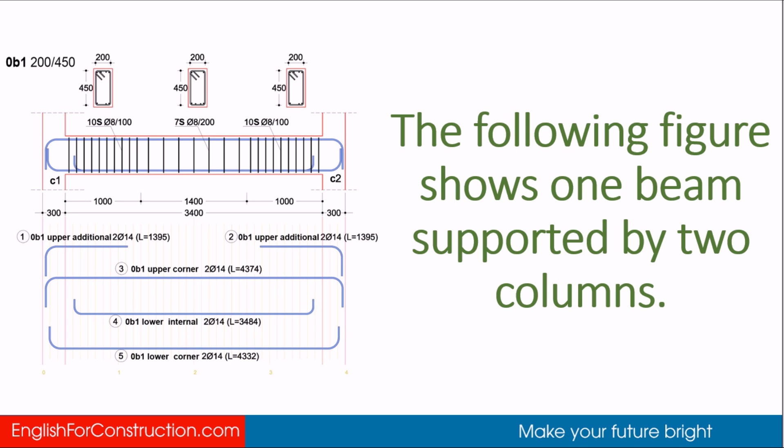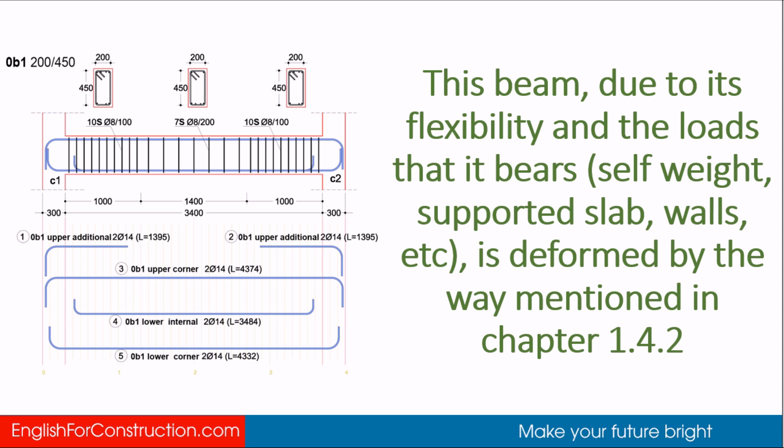The following figure shows one beam supported by two columns. This beam, due to its flexibility and the loads it bears—self-weight, supported slab, walls, etc.—is deformed in the way mentioned in Chapter 1.4.2. The reinforcement placed inside beams consists of longitudinal bars and transverse reinforcement in the form of stirrups, or ties.

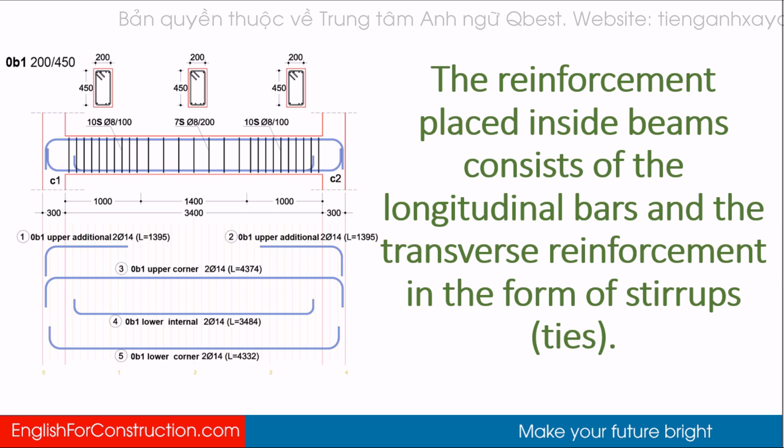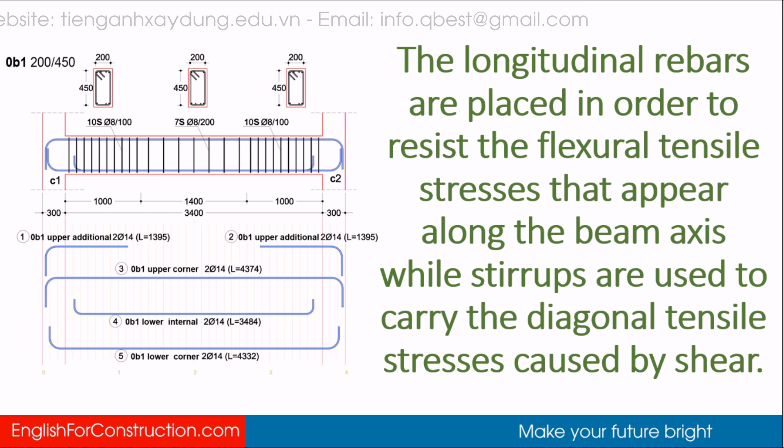The longitudinal rebars are placed in order to resist the flexural tensile stresses that appear along the beam axis, while stirrups are used to carry the diagonal tensile stresses caused by shear. Moreover, stirrups help in the confinement of longitudinal reinforcement in critical areas.

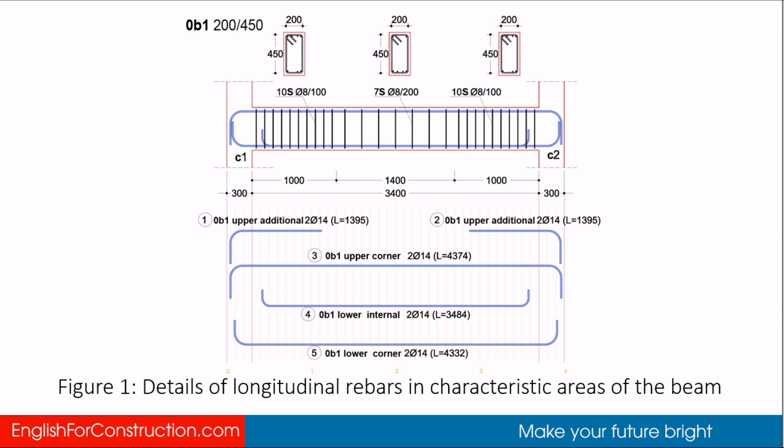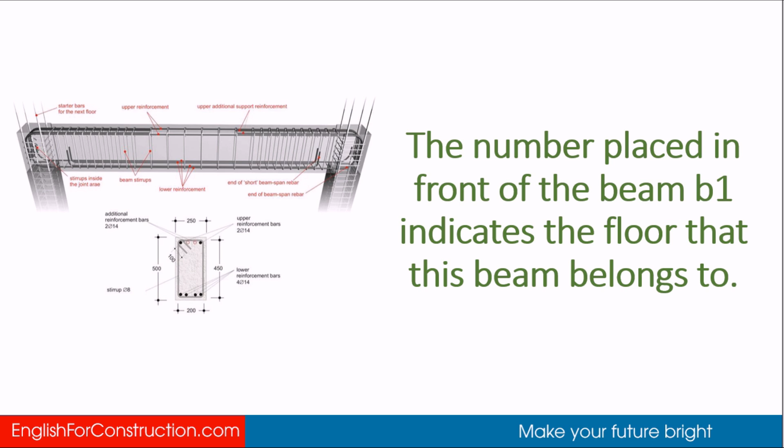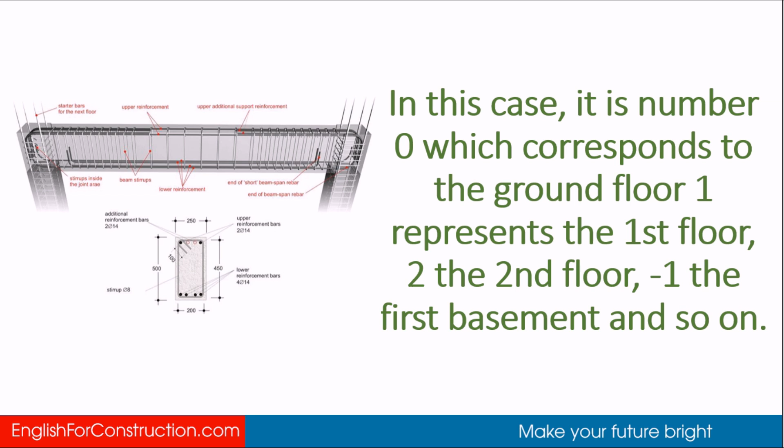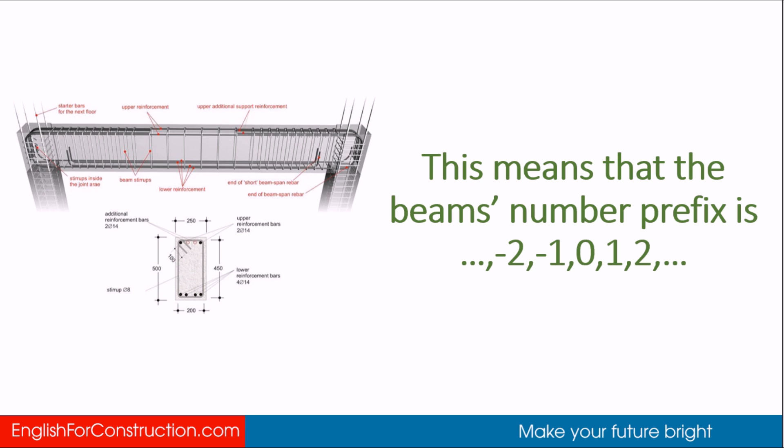Figure 1. The number placed in front of the beam, B1, indicates the floor that this beam belongs to. In this case, it is number 0, which corresponds to the ground floor. 1 represents the first floor, 2 the second floor, -1 the first basement, and so on. This means that the beam's number prefix is -2, -1, 0, 1, 2.

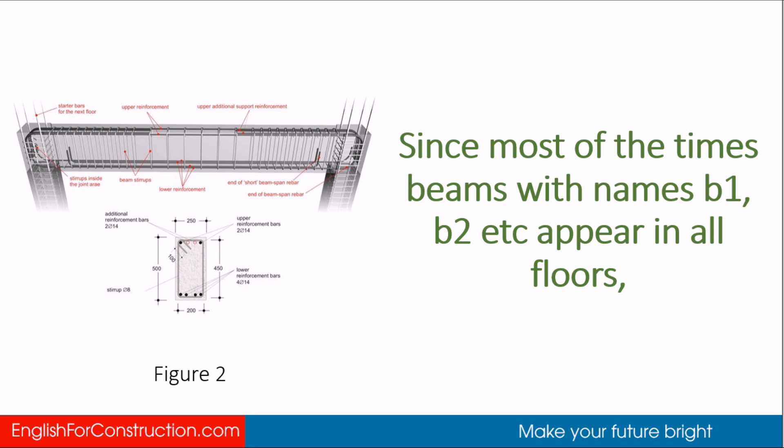Figure 2. Since most of the times beams with names B1, B2, etc. appear in all floors, it is compulsory to use the prefix both in the constructional drawings and in the beam's labels, so as to avoid confusion with the drawings and the various materials used. These are specified in the beam's labels.

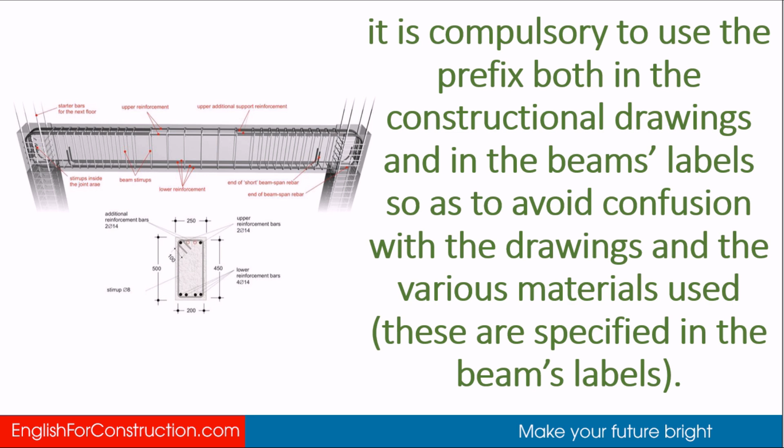The label 10SØØ10/100 means that for the critical length of the beam, which is 1.0 meter, 10 stirrups will be used, with a Ø10 diameter and 100 millimeter spacing.

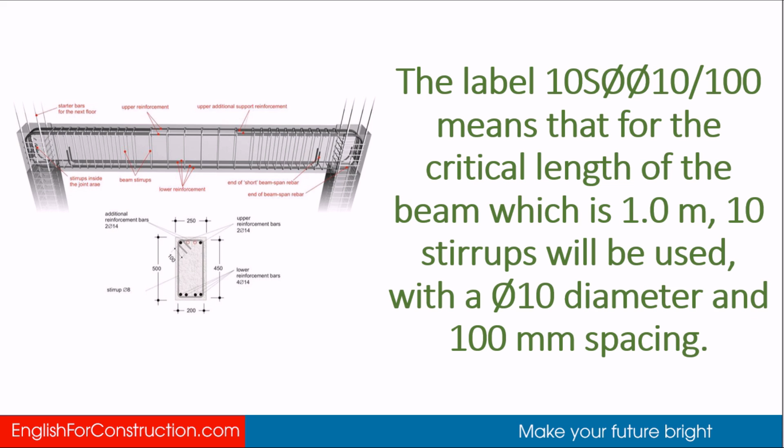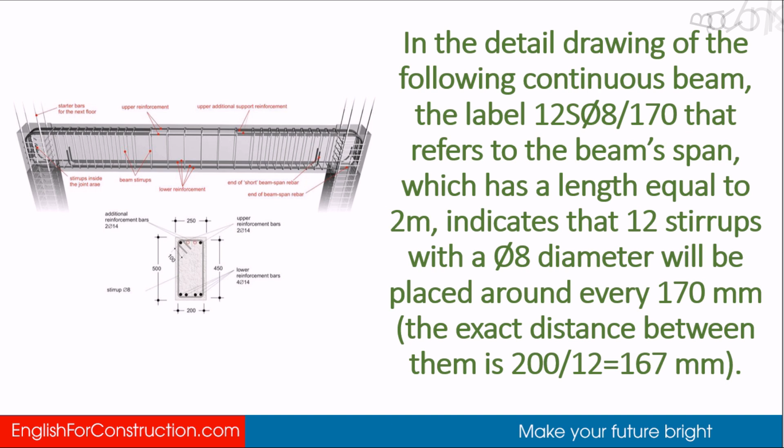In the detailed drawing of the following continuous beam, the label 12SØ8/170, that refers to the beam's span which has a length equal to 2 meters, indicates that 12 stirrups with Ø8 diameter will be placed around every 170 millimeters. The exact distance between them is 200 over 12, which equals 167 millimeters.

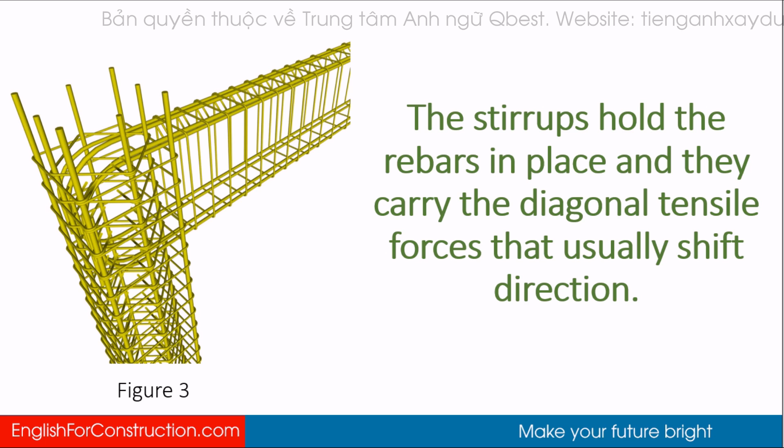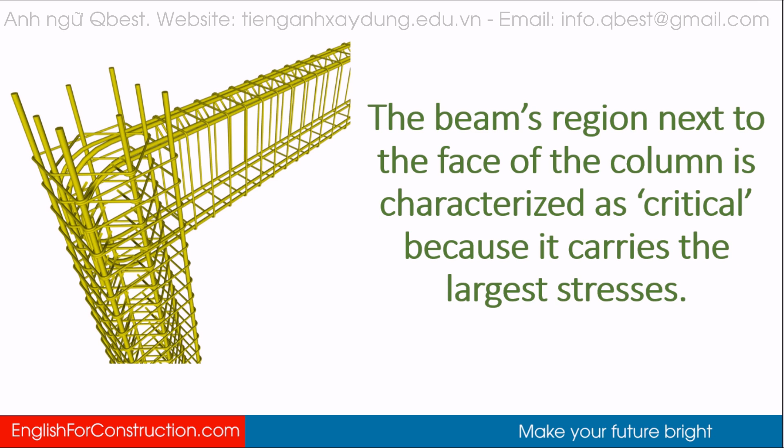Figure 3. The stirrups hold the rebars in place, and they carry the diagonal tensile forces that usually shift direction. The beam's region next to the face of the column is characterized as critical because it carries the largest stresses. Its length is equal to 1 to 1.5 times the depth of the beam.

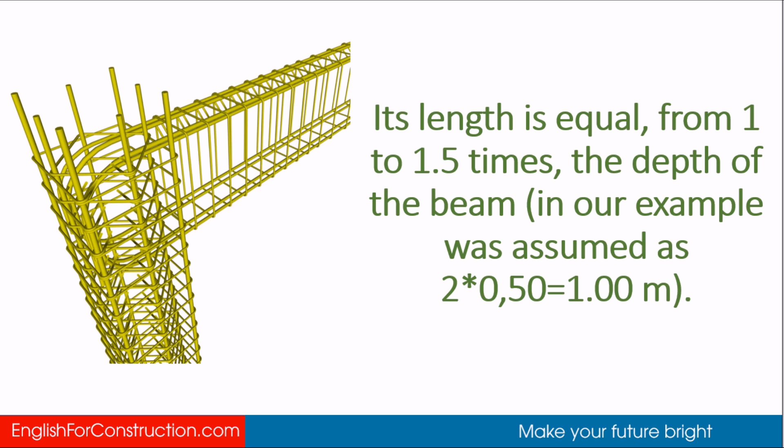In our example, it was assumed as 2 times 0.50, equals 1.00 meters. The stirrups placed at the critical areas must be narrowly spaced and properly closed.

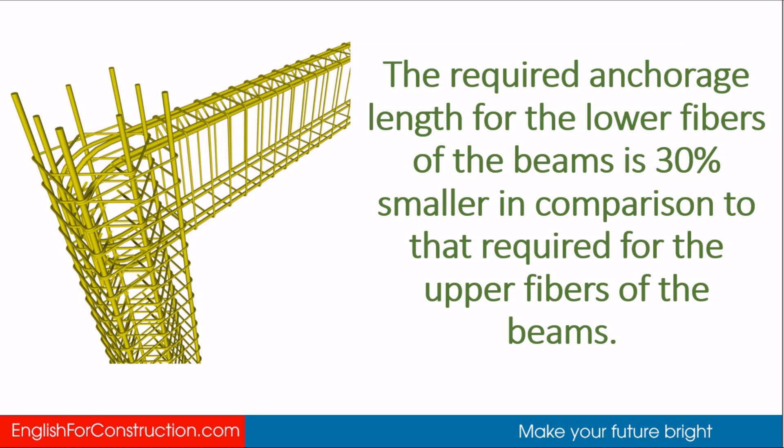The required anchorage length for the lower fibers of the beams is 30% smaller in comparison to that required for the upper fibers of the beams.

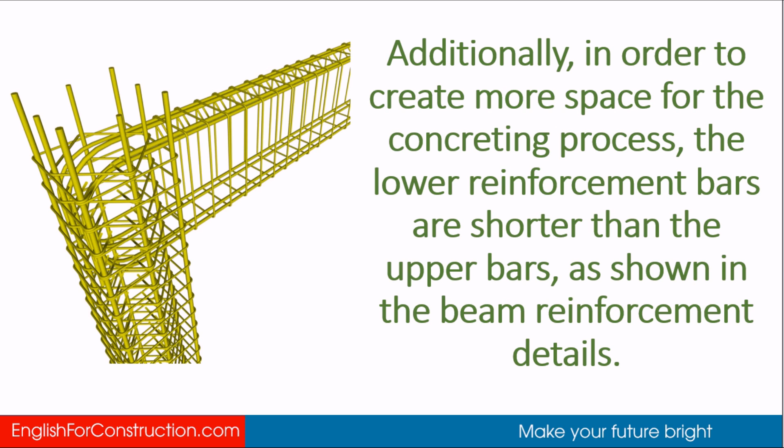This is the reason that in finishing nodes, the lower beam reinforcement bars are anchored with a smaller hook. Additionally, in order to create more space for the concreting process, the lower reinforcement bars are shorter than the upper bars, as shown in the beam reinforcement details.

The beam's width must be greater or equal to 200 millimeters, and at least 2Ø14 must go through the full length of the beam, both at the top as well as at the bottom.